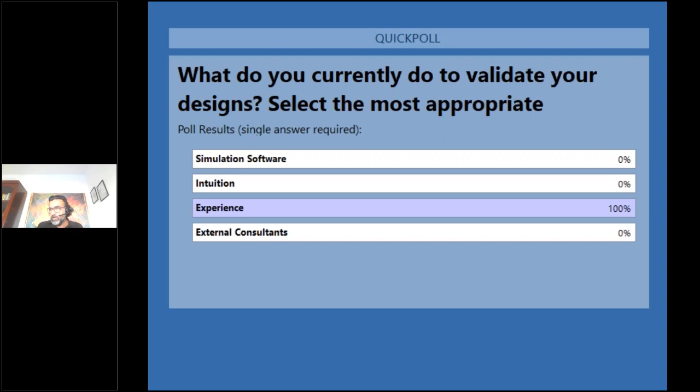Ah, that's perfect. It looks like everybody is using experience, which is very common when I go and see customers, which then leads me to the next slide.

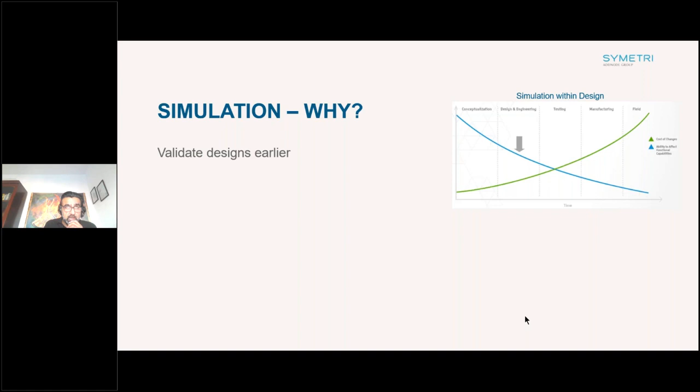So the question is, why do we need to do simulation? Typical scenarios would be that we should be able to validate designs earlier. I guess, yes, you can use experience as well. And the other big reason is obviously you don't want any failures happening within the industry, so simulation can help you validate that.

With this option, when you're basing decisions on experience, everybody's under pressure with time, so obviously you don't have the ability to check different scenarios.

Materials is one factor, but most importantly, in my opinion, is to design with confidence, because this gives you the ability to check whether a design will fail, because you can actually test it. What happens if it's dropped? And many more what-if scenarios.

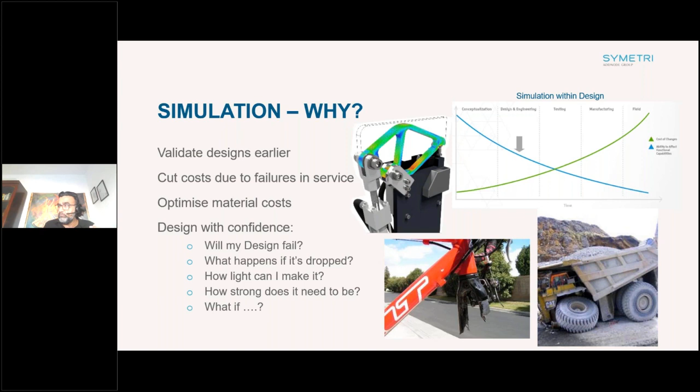It gives you the ability to try these things under the time and pressure you're under, rather than just basing decisions on experience, which will happen anyway. And it can help you reduce design and development times when you're under a lot of time pressure.

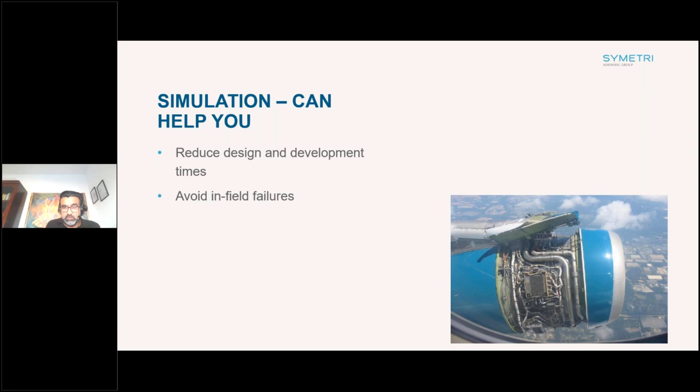And I guess it helps avoid in-field failures. You don't want to be sitting in a plane and seeing something come off the wing.

With what-if scenarios, you have the ability to check different scenarios and basically innovate. And again, in my opinion, the most important thing is being able to design more confidently.

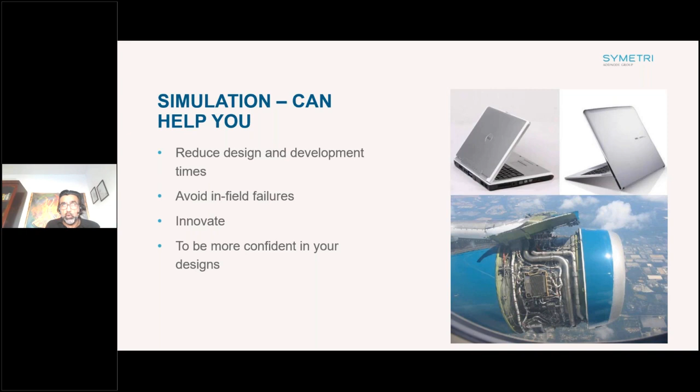For the next poll, I just want to get an idea—I think this is probably self-explanatory, since everyone said they weren't using any software. So I think this would be a straightforward one. I'm guessing the last option.

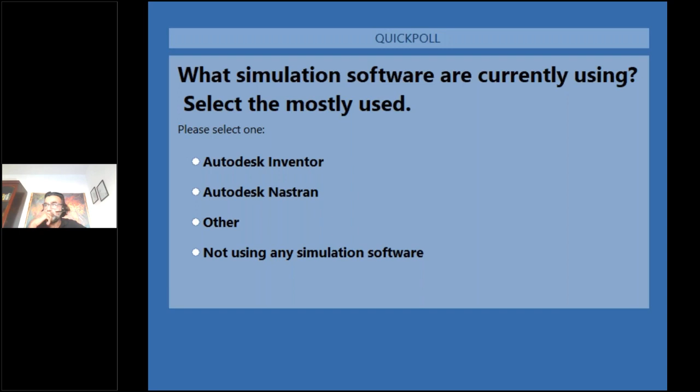Okay, this is a bit of a mixed bag. We have people using Inventor, other technologies, and also what I suspected. So basically we've got a nice split between the audiences.

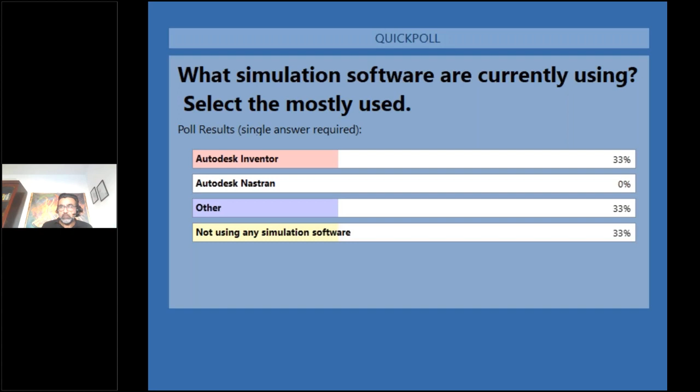If I go back to my screen now, Emma—thank you. So, as Symetri, we have traditionally been supporting clients like yourselves around the Autodesk portfolio.

But going back to just before the pandemic, we started looking into a partner, Altair, to provide complementary solutions to work alongside the Autodesk portfolio. Let's go through these to give you an idea of the options you may have.

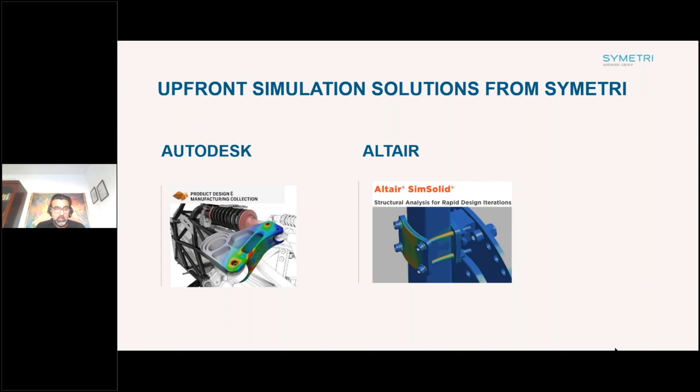Obviously, this is very popular—a lot of customers will be aware of Inventor Stress. This gives customers the ability to do a linear analysis, which is probably the most common type of analysis required by many customers, and it lets you analyze single components and also assemblies, as you can see here.

In technical terms, it allows you to have different types of elements. This is what you can do currently. So anybody with Inventor or Product Design and Manufacturing Collections has access to this and can start using it.

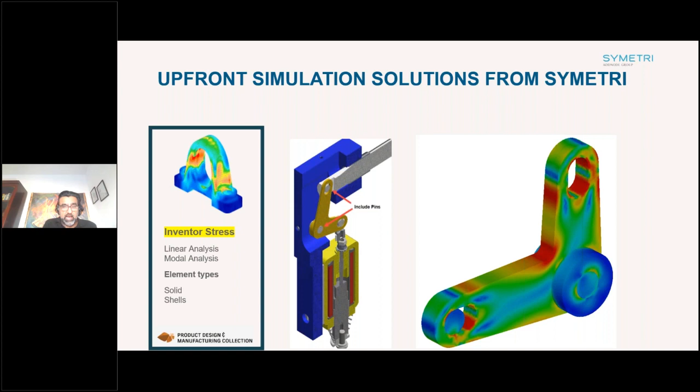This next one is probably not as commonly used. It's available only under the assembly environment. It's called frame analysis, and it's dedicated to structural framework-type analysis. If you're familiar with frame generator or content center and create content using that library, you have access to it.

Then you have the ability to do a structural or beam analysis—different terminologies for the same thing you do in Inventor Stress using linear and modal analysis.

As you can see here, it only does beams. You can look at shear force and bending moment diagrams—it's pretty powerful. But it's only available if you're using frame generator or content center libraries from inside Inventor.

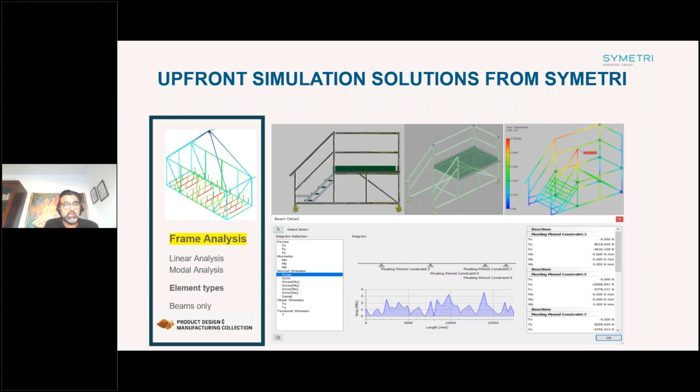This next one is also not very common, because you won't see it in your default Inventor installation—it's not there. It's in the same area as your Inventor Stress analysis, but you can only see it if you download it.

You download it from the download section of your account. Inventor Nastran is a very powerful

comprehensive solution, and it does a lot more than Inventor Stress. It handles buckling, fatigue, and non-linear analysis. You can have different element types—solids, shells, and beams. You can do pretty complex analysis in here.

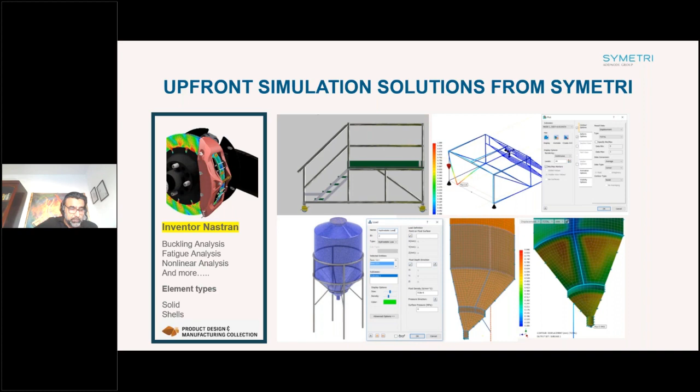And then the fusion simulation software, like Inventor Nastran, again, is very powerful. And it has similar technologies, the same solver as Inventor Nastran, but a different look and feel. The interface is very new, and it has some specialist analyses not available inside Inventor Nastran, primarily things like electronic cooling, which is a bit like fluid flow analysis. Then you have the powerful shape optimization, similar to generative design, but in a different way.

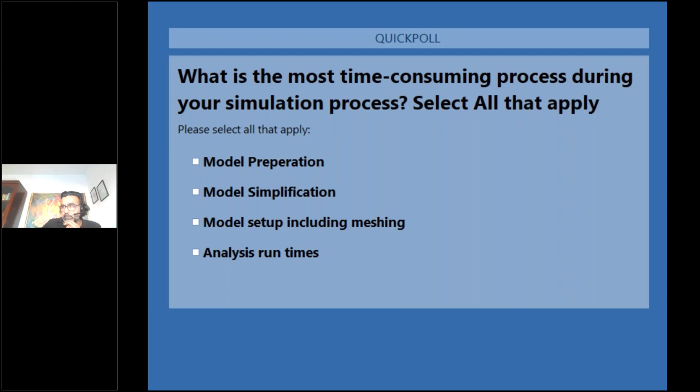So we can see here the most time-consuming process is model preparations, and the setup and run times can be basically less time-consuming, but then again, model preparation also includes model simplification. So whether simplification or preparations, that seems to be the most time-consuming process. And thanks for that, Emma.

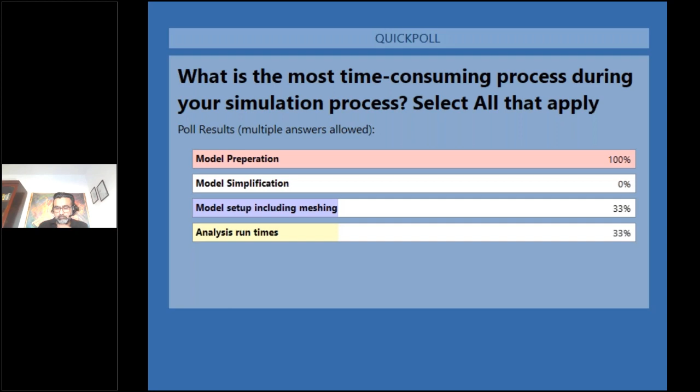Okay, so the technologies I mentioned, I would refer to them as traditional FEA solutions, and that also extends to softwares like ANSYS, Abaqus, COMSOL, Nastran. All are referred to as traditional solutions, and they all have one thing in common.

They all require a mesh, this triangulation of elements in the software for it to give us any form of results. And then the size of the mesh will have a huge impact on the solution times. Basically, the smaller the mesh size in your models, the huge impact and it will take a lot longer to run, but the results will be more accurate. So if the element sizes are larger, the results may not be that accurate. So there has to be some sort of compromise, which you guys will probably juggle between.

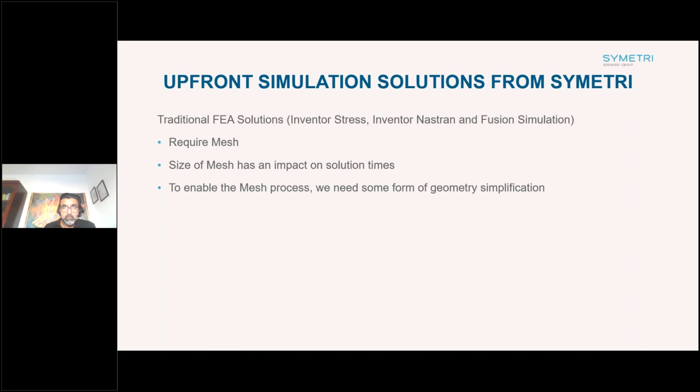And then the most important one, the reason we go through model preparations or simplification is that we need to enable the mesh process, because the geometry, the golden rule is make it simple, which is the other extreme when designers are trying to add every single detail in geometry. As an FEA person or an analyst, we are going to the other extreme. And then again, depending on the detail, the complexity of the models and the size of the models, this can be very, very time consuming, as you saw in the poll.

And here I have some examples of the problem areas where mesh will fail. So things like assemblies with big and small or thick, thin parts with gaps, small geometry features, and an example here of extreme geometric complexity. You will not be able to analyze that in a traditional FEA solution. And then we have geometries very common in castings type examples where you have a lot of transitions or sliver faces. So these are what we refer to as problem areas which need to be simplified for the mesh to be able to be created.

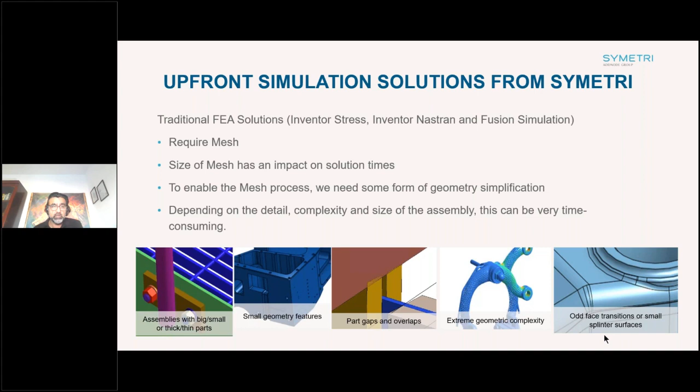Now, we came across a technology several years back referred to as Altair SimSolid. When I first saw this software, it was absolute pure magic because the software actually works on the CAD geometry without any simplification, because it does not require a mesh. So if it doesn't require a mesh, there's no need for us to simplify it. And the other thing I like about it is it's absolutely fast to run.

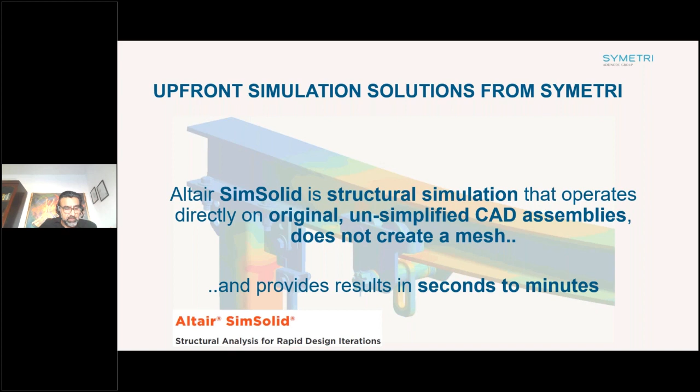So if you have models which you spend several hours trying to clean or do geometry simplifications and preparations, there's no need to do that. The reason being is that the software is very, very powerful, and it ignores and works around all the small features, things like what we refer to. So these are not an issue.

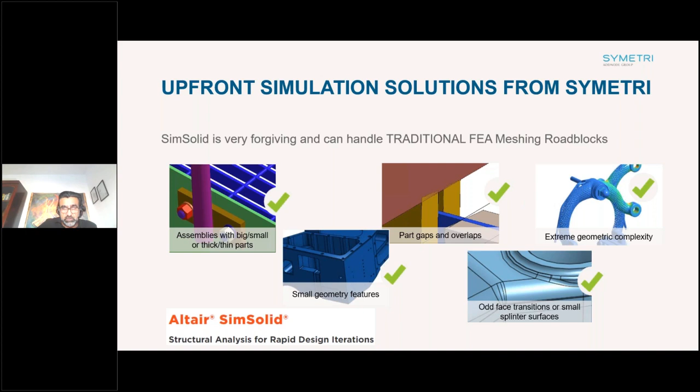And what I'm going to do here, basically, well, before I do that, because we have clients like yourselves using Nastran, we do not expect you to change the way you're doing things. So we focus the use of Altair SimSolid in 4 different areas.

The first one is complex models. Now, softwares like Nastran or Inventor Stress will not be able to analyze this sort of complexity where it's a 3D printed part or it's lattice structures or organic structures, something which is pretty detailed and complex. So this is an area where Altair SimSolid can be very, very powerful.

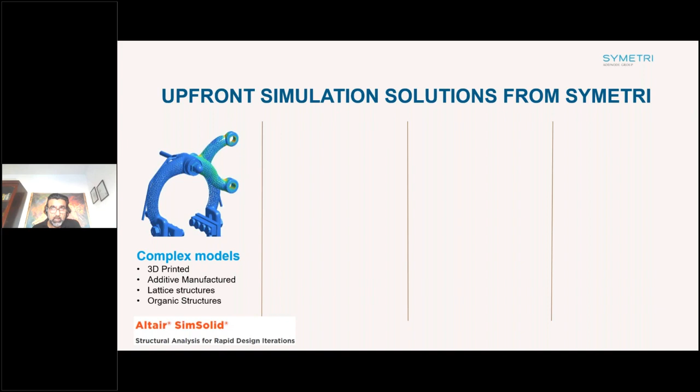The other one, which is probably the most popular option within our clients, is when you have super large scale models. This can take a long, long time to set up and prepare. Whereas if you already got the model, you can take it into SimSolid and it basically will just work as it is from the model.

Very little setup required. And then again, original models, if you have bolted connections, for example, as you may well be aware, if you use Inventor Stress or Nastran, you cannot use bolted connections. You have to suppress them, then you have to recreate them again inside, let's say, Nastran or Inventor. Well, you can't do them in Inventor Stress. So this is a great example as well.

And finally, as you will see in a moment when I do a live presentation on an example, the results are absolutely super fast.

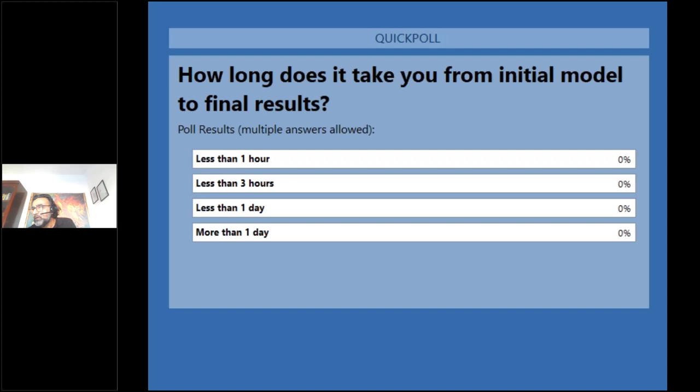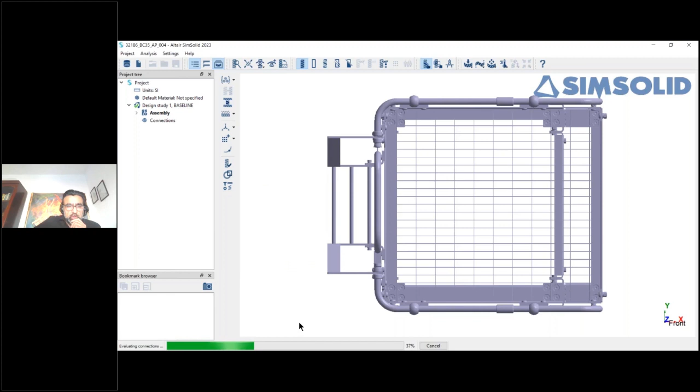So what it's doing here basically is going through and importing the actual geometry into my SimSolid software. The first thing you'll see on the dialog box is that you will see, very similar to Inventor Stress, that you need to define the contacts between the geometries. If everything's touching, the gap and penetration options can be set as 1, so I'll keep the default settings. Then it goes through a process of creating hundreds and hundreds of contacts.

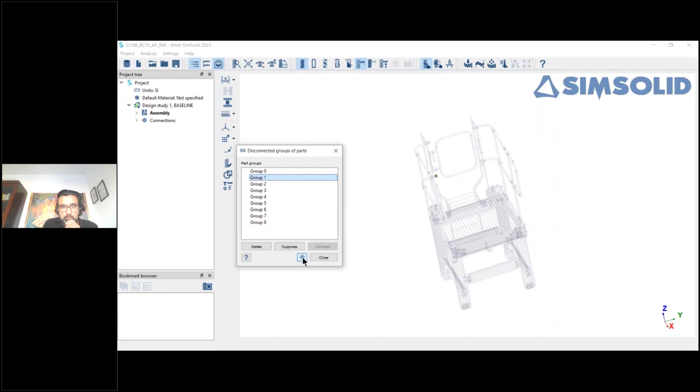Then it's got this warning saying that there are some components in here which are not connected. So I'm going to go in here. Well, everything seems to be connected here, so let's zoom out. And then if I look at group 1, I can put the little magnifying glass on. You can see these are little sort of connectors.

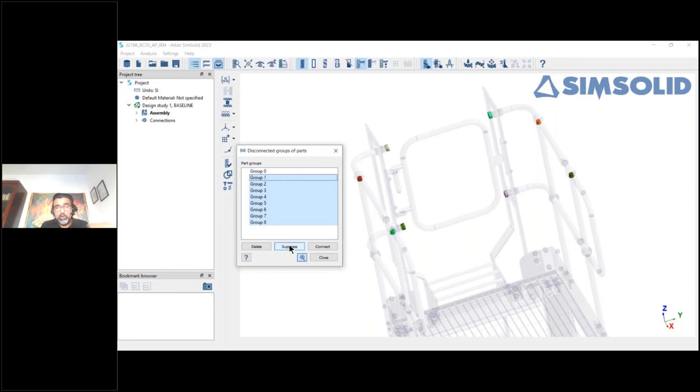I mean, I could go and increase my gap between the components and have them, but as an FEA person, I don't think these will make any difference to my results, so it's pretty easy to suppress them. You don't need to suppress these also inside Inventor; you just leave them as they are, bring the whole thing in, and you can suppress them from here.

So once they have been suppressed, then everything should be connected. You can check this from this little button here. Everything seems to be connected. So there is your sort of setup. Now the only thing I need to do here, because it was a step file or a Parasolid file, you need to apply some materials. So I'm going to apply everything as steel just to keep it simple.

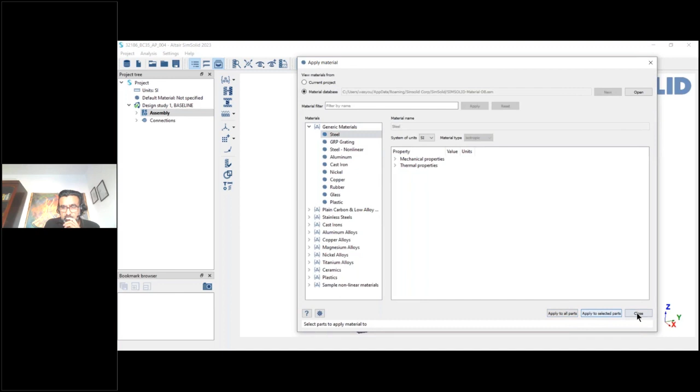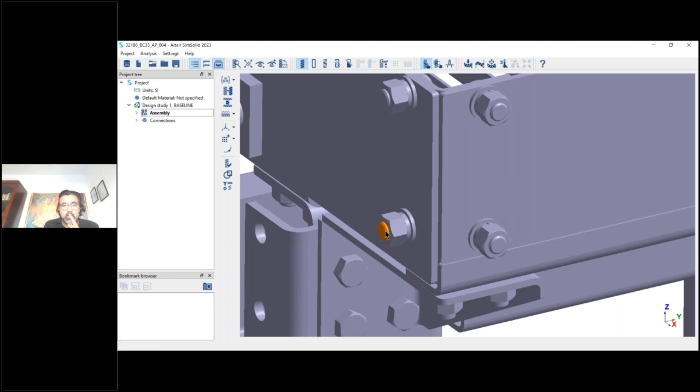So now we have defined the materials, and the next step is I want to find out, as an example, how applying the weight of some maintenance workers with their kit on here affects how strong it is. But one thing I want to show you here, which I think is absolutely powerful on SimSolid, is if I click on that bolt there and right-hand click on here, the software creates a special contact between both the connections.

You can see there, you can barely see it. I see sort of yellow cursors, and that basically is a sliding contact. So it creates a sliding contact between the bolt shank and the hole plates, and the bolt and the nuts are fixed. So it does that automatically, saving you a lot of work and effort.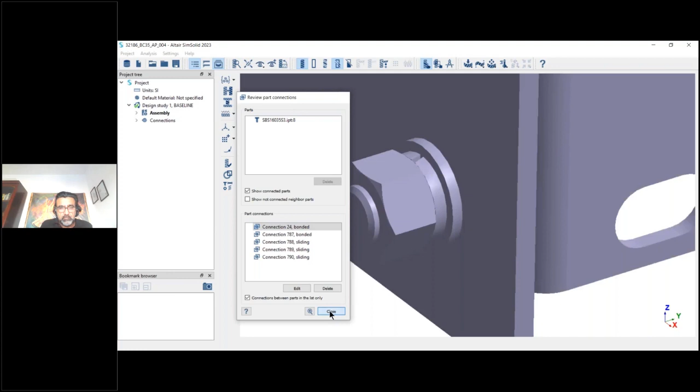And now what we're going to do here is we can go and create a structural linear analysis. The only thing I need to do here are two things. I'm going to restrain down here, so I'm going to fix that one. Inside Inventor Stress and Nastran, you would have to create 6 separate faces if you want to check the reactions on each face individually. Inside SimSolid, you can do it all as one or separately—it's entirely up to you. So that's done that one.

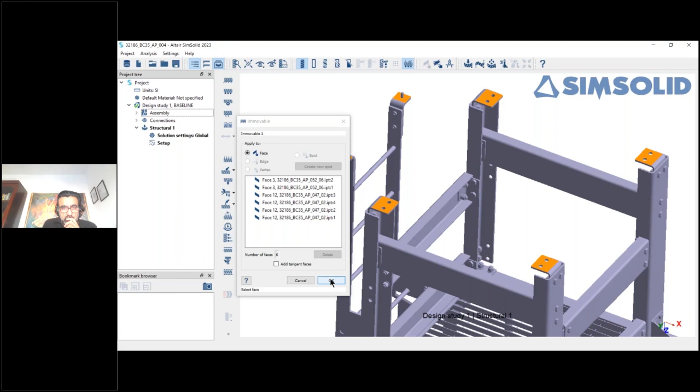Now, typically, this type of example, you will not be able to run inside Nastran or maybe Inventor Stress because it has to mesh. You may remove this platform, for example—that's one way you would do it. You might remove the handrails because you want to make it simple, you want to be able to mesh it. Here, it doesn't really care where you do it.

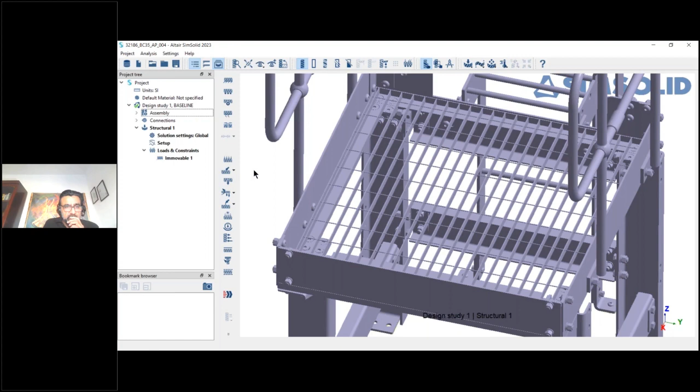So I'm simply going to apply a load on the top here. Let's put that here, it pushes it on. You see there, it's going to go all the way across, and it's going to be in the Z direction. Let's say minus 2,000 newtons, 200 kilograms.

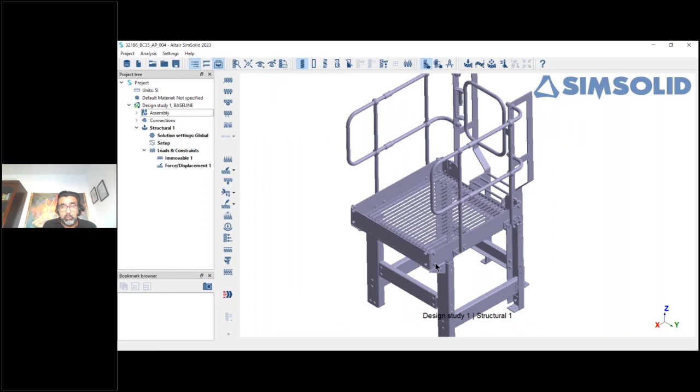And that's it. So you probably will be spending time on this in the traditional tools by suppressing all the handrails, removing all the bolts and keeping it simple. And then in a typical process, you have to run it 3 or 4 times to get the mesh convergence.

Now, if I press run here, hopefully I've done everything correctly, you'll see in the bottom left-hand corner the software is going through 3 iterations automatically by default. And I'm using a laptop here, so nothing powerful. Within less than a minute, I guess, we'll have some sort of results. This is how fast the technology is.

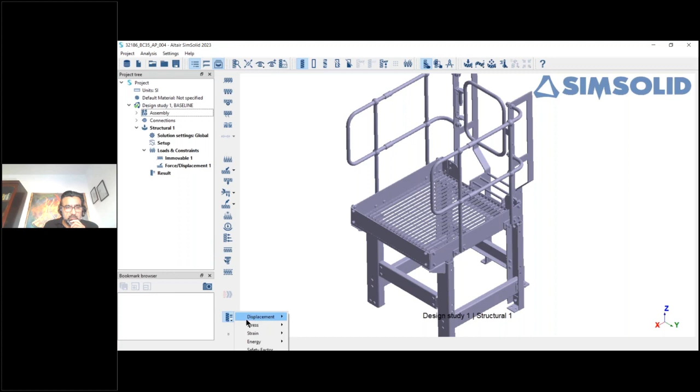Okay, that's done. So we'll go and have a look at some results just to give you an idea of what the behavior is. That looks okay. And if I just show it deformed, you can see it's deformed, and you can do the animation.

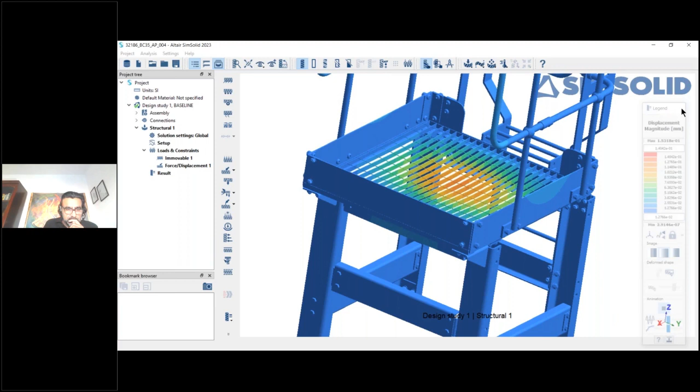So it gives you the behavior as we would expect. And the other thing I like about this, which is very powerful, is if you want to look at the bolts. It creates a table of all your bolts in the model with all the forces, shear forces, and bending moments, and you can export that to a spreadsheet and start interrogating. So I think that's pretty powerful.

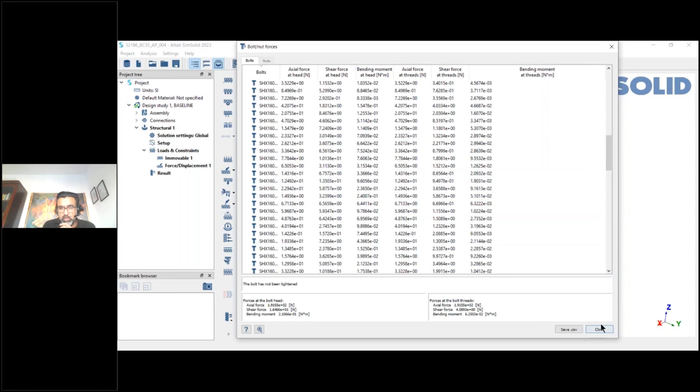So I just want to give you a brief overview of what the technology can do. I hope that was pretty impressive in the timescale. I've demonstrated that with traditional tools, I don't think you'd still be doing your model preparations. So let's go back to the slide now.

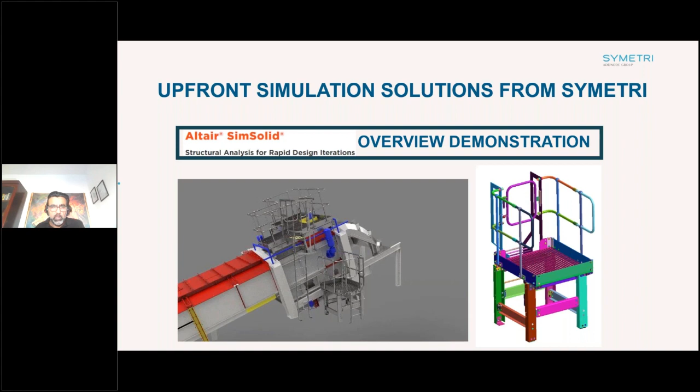Okay, just as the final part of my presentation, as I was fortunate to be in Sin City, this is a snapshot of my class presentation. I won't have time to go through all of it, I just want to give you a look and feel of what the class was about. In the handout section, you have a PDF of the presentation, and also a PDF of the handout, which you can access.

I basically went through four different sections, giving you some linear analysis, impact analysis, and different areas and further learnings. I just want to give you a feel of what it's all about. Basically, it's broken down into some tips and workflows, and then I did a live demonstration of one of these examples, which I won't be doing today because of time. So I just want to go through to see what it's all about.

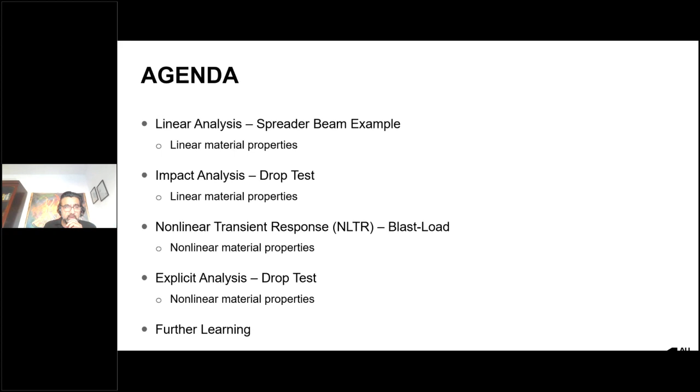So the first section is the linear analysis. This was a question I get asked a lot from the offshore industry, primarily when they do lifting type scenarios. And this was going through that same example.

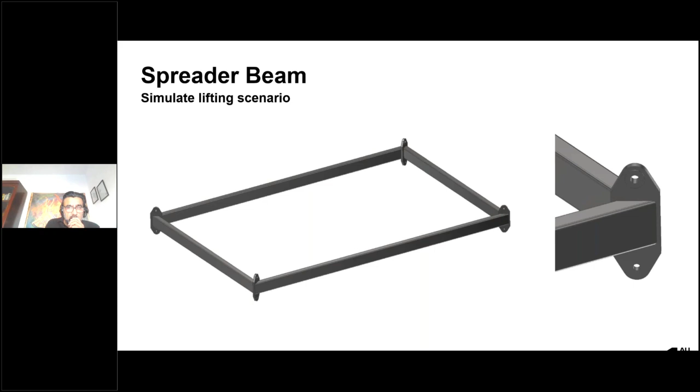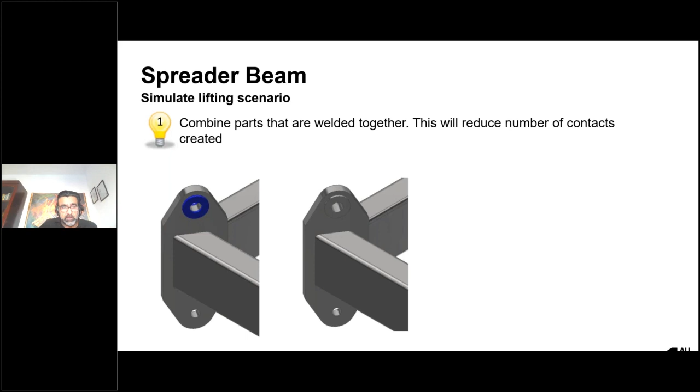Some of the tips suggested here: if you have a fabrication or an assembly which is all welded together, try to reduce the number of contacts in Inventor Stress or Nastran, you might as well combine the parts together. It makes no difference, you have fewer contacts, so it'll run quicker.

This is also very common, I see time and time again customers using solid elements on long, thin, slender objects. As a rule of thumb, if you have a component with a thickness-to-length ratio of 1 to 50, I suggest you use the shell elements option so it runs faster and you get more accurate results.

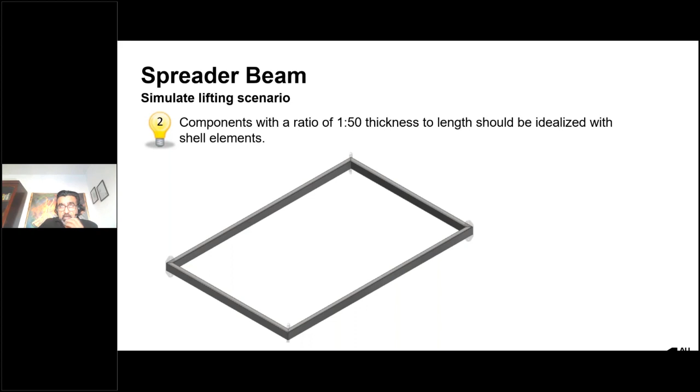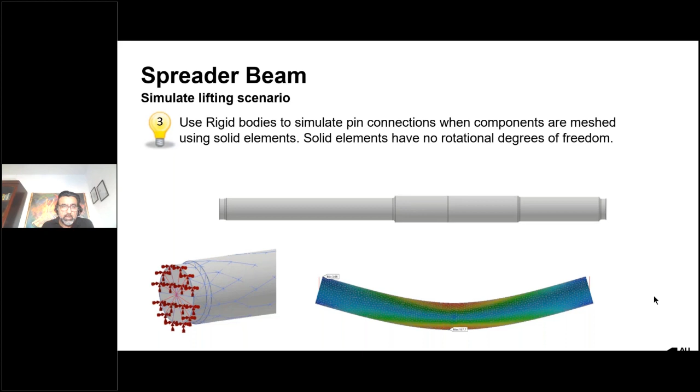The third tip looks very simple. I want to take a step shaft and create a simply supported connection. Now, obviously, solid elements don't have pin-type connections, so it's pretty impossible to do this inside Inventor Stress. So you can use rigid body connections, a very special type of connection, to get what I call a smiley-face type of result. This correlates with our hand calculations within 1%. So use rigid bodies to do pin-type connections at the end of a solid shaft.

And when you're using shell elements, I suggest you use offset bonded contacts rather than bonded contacts, because bonded contacts only restrict 3 degrees of freedom, while offset bonded has 6 degrees of freedom. That's the difference between the two types of contacts.

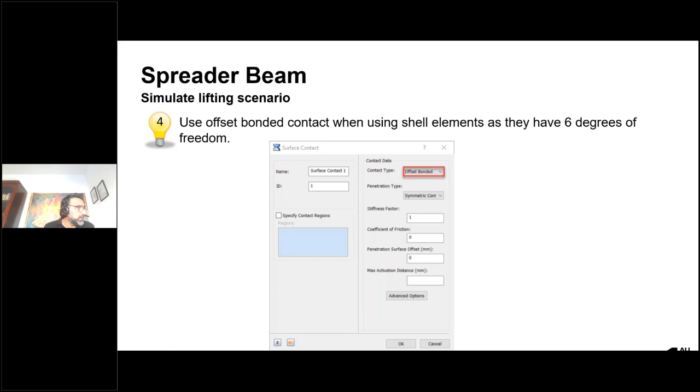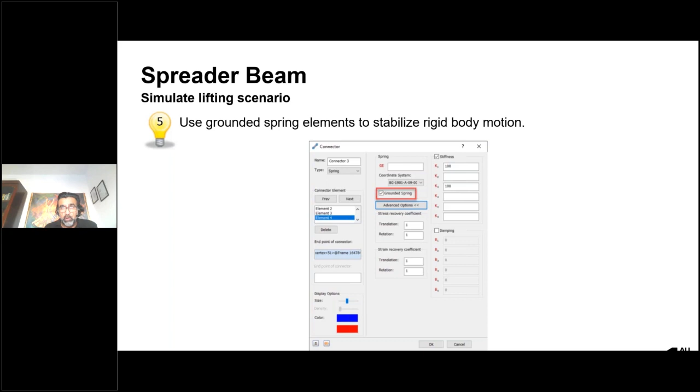The last one, option 5: when you have a rigid body scenario, whether you use Nastran or anything else, you'll get an E5000 error, which basically means it's not fully constrained. But you decide, well, it's already fully constrained. Use rigid springs or grounded springs to stabilize your models.

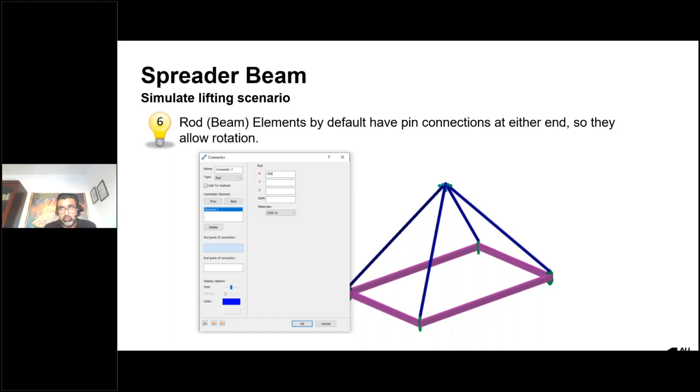And the last one, I was demonstrating that you can use rod elements to represent the slings for how you lift the actual spreader beam. So this gives you an idea of the tips and tricks I go through, then a live demonstration. When I was in Vegas for my class, you can look through my handouts for the workflows. But at least this gives you an idea of what the class was about. Hopefully within a week or two, it will be available on the Autodesk University website for you to look at.